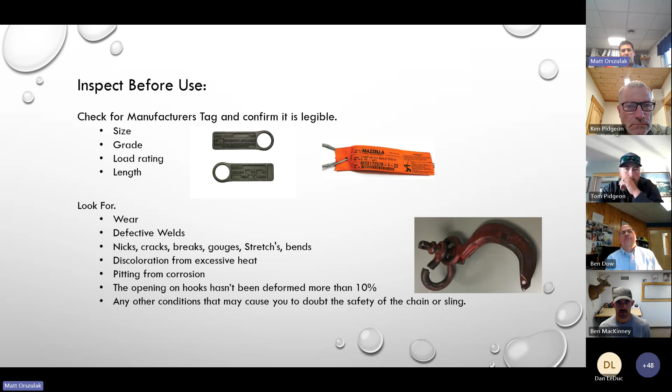Again, it's always that 10% wear threshold. We have gauges to check the links. Tom and I are going to be going out and verifying that, or you can bring them into the tool crib, and Elliot and Bill will also do a thorough check. Usually we do it more toward the tail end of the season, but we're going to start it early because we have a lot of chains out there.

So best practice with chain slings: try not to ever shorten it or tie it. Where we have our biggest problems, where we're snapping chains, is doing stuff under tension - pulling something out of the ground that's stuck, or a trench box or road plates buried in the soil, and we try to lift them with a jerk motion using the excavator. These chains are not designed to be under that much tension.

It's meant to be suspending a load just by gravity, not getting stuff stuck. So side loading too. Anytime you side load a hook or a chain, you're really compromising the integrity, and that's when we see chains snap. And it's a very violent, dangerous situation when we have alloyed metal shards flying through the air. Someone can really get hurt badly.

So those are the type of unsafe acts that we need to eliminate so we don't break chains out there. So really think about what we're doing before we do it and make sure we've got the right tool for the job. If something does change in the field, make sure we're not just grabbing a chain and trying to pull something out of the ground.

So avoid any twisting or kinking. It's the same thing. That's how easily, if it's really twisted and then you put it under tension, it's easy for these alloy chains to become defective and get compromised.

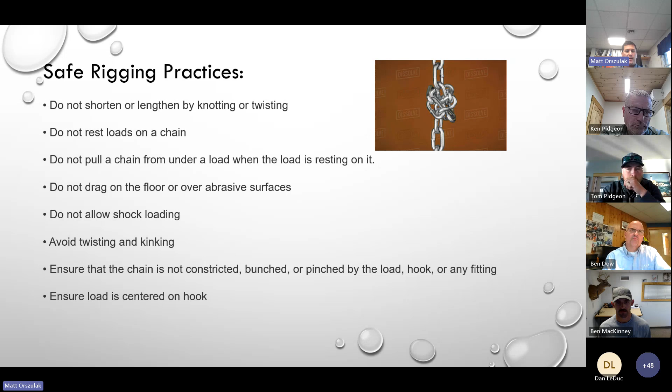So proper care, again, these should be hung up in a dry environment. That's why we have our tool trailers out there. So again, not in the back of pickup trucks. It's fine day to day, but if you're not utilizing them for a while, let's get them up high and dry and into tool trailers.

Or back here at the office, we want to try to make sure that our chains stay in decent condition. When there's a lot of rust, that moisture and rusting of the alloy chains can really compromise our chains. So we want to make sure they're free from the effects of weather, especially if it gets really muddy. It doesn't hurt to power wash them down and hang them out to dry.

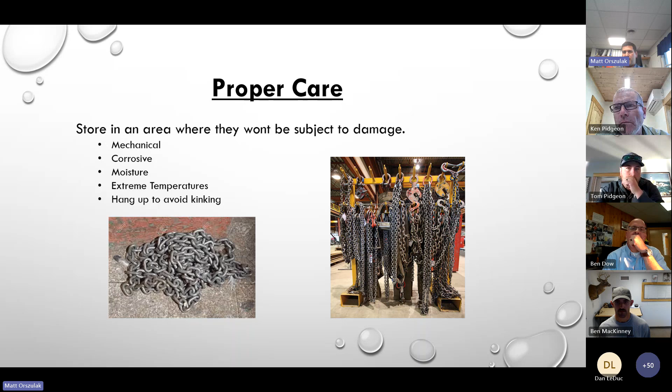So some quick cautions and best practices with all rigging, but chain rigging as well. Again, never pass underneath a suspended load. Never stand in the line of fire with a chain when it's under load or any tension. And make sure all body parts are not between the chain and the load.

We've had a couple incidents, not really with rigging, but with binding our chains down. People fastening equipment onto a trailer, binding it down, putting their hands where they shouldn't be, and then it's under tension, creating those pinch points, putting our hands in between a movable object and an immovable object.

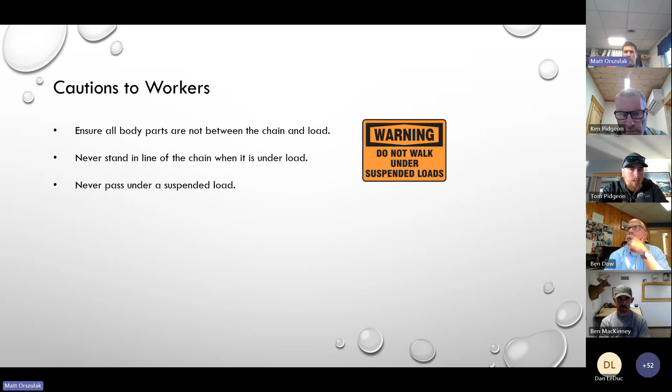So some things to consider this week. But again, let's just follow those best practices, inspect, make sure that you have the right tool for the job. And if you don't, let us know. We'll hopefully get you what you need for all the safe rigging that we do each and every day, all the different types of jobs we have going on.

Is there anything to add, Tom, Ben, Ken, on chain safety?

Just a couple things. One thing I've been noticing is guys aren't necessarily being taught the right way to hook the hooks, especially on trench boxes when they're lifting them up. So make sure that if you have newer guys on your job site, you're showing them the proper way to have the hook facing out, so that it's not going to break the hook.

Yeah, don't side load the hooks. That's part of the training.

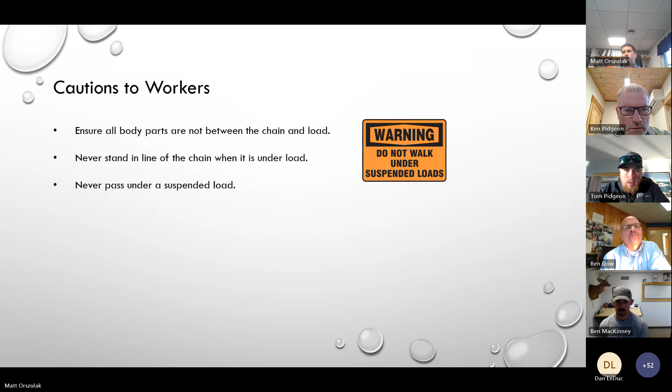Okay, well that's all I have.

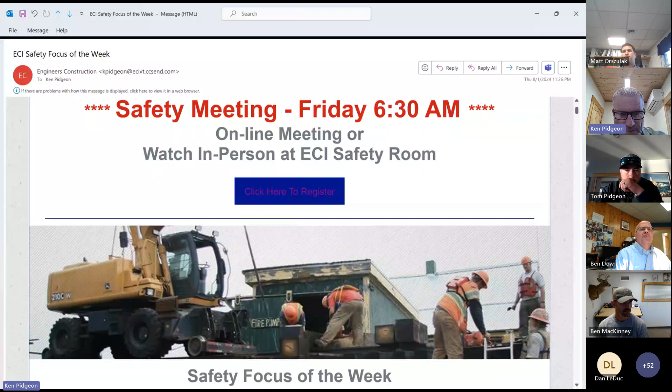All right, good. My connection seems a little sketchy here, so hopefully I can continue. I will get to the ECI focus of the week. There we go. All right, do you see my screen? Yep, we have it. Okay, good.

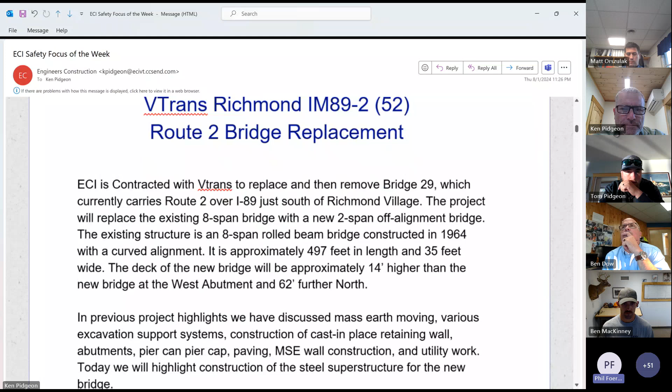ECI was contracted with VTrans to replace and remove Bridge 29, which currently carries Route 2 over I-89 just south of Richmond Village. The project will replace the existing 8-span bridge with a new 2-span off-alignment bridge. The existing structure is an 8-span rolled beam structure constructed in 1964 with a curved alignment, approximately 497 feet long and 35 feet wide.

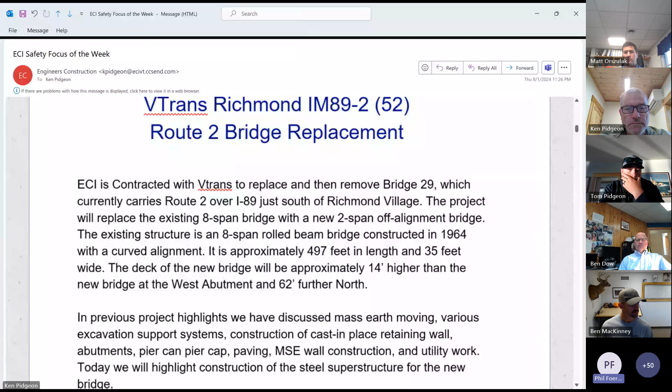The deck on the new bridge will be approximately 14 feet higher than the old bridge at the west abutment, and 62 feet further north. In previous project highlights, we discussed mass earth moving, excavation support systems, construction of the cast-in-place retaining wall, abutments, pier stem, and pier cap, paving, MSE wall construction, and utility work. Today we will highlight the construction of the steel superstructure for the new bridge.

Before we could erect the two 358-foot long steel plate girder spans, we needed to construct crossovers, putting single lane traffic in each direction into the barrel on the interstate.

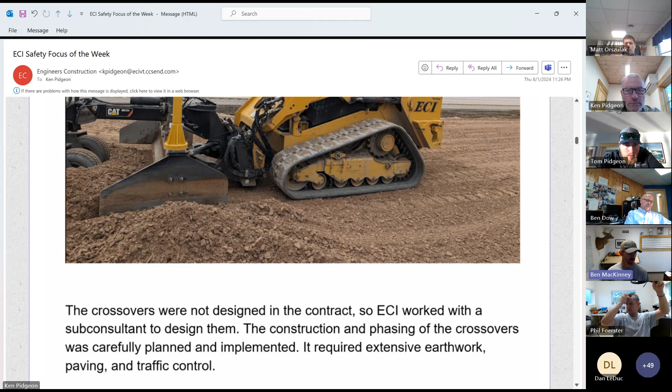The crossovers weren't designed as part of the contract. You were allowed to use crossovers, but it was up to the contractor to design and implement them, from traffic control to curve geometry and tie-in points. Rather than closing the interstate, we elected to use those crossovers, and we worked with a subconsultant to design them. The construction required heavy earthwork, paving, and a very careful approach to traffic control, including safety marking, removal, replacement, temporary striping, and wall barrier.

Once they were built and paved, we worked with L&D to remove existing striping and restripe, and deployed just under a mile of Jersey barrier.

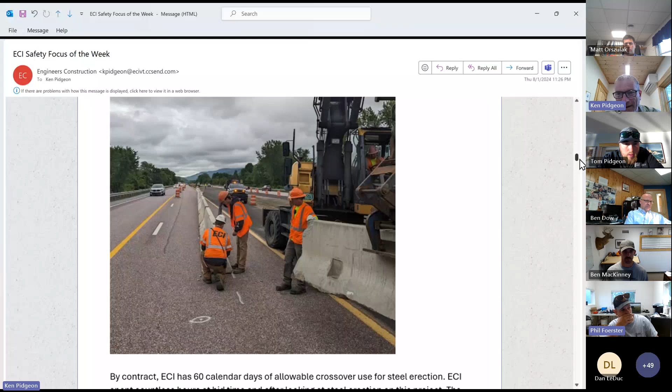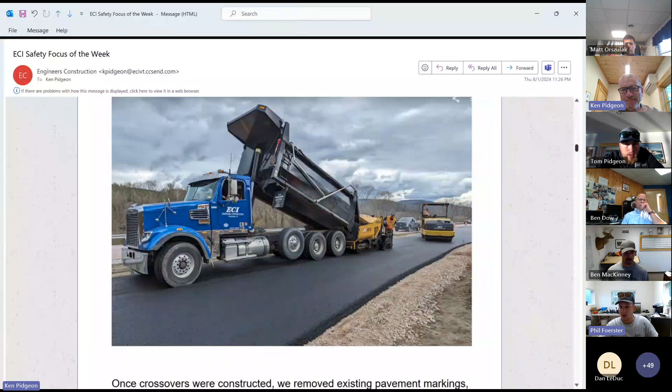By contract, ECI has 60 calendar days.

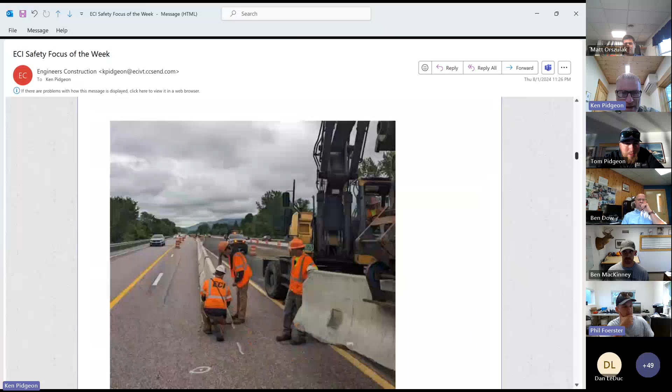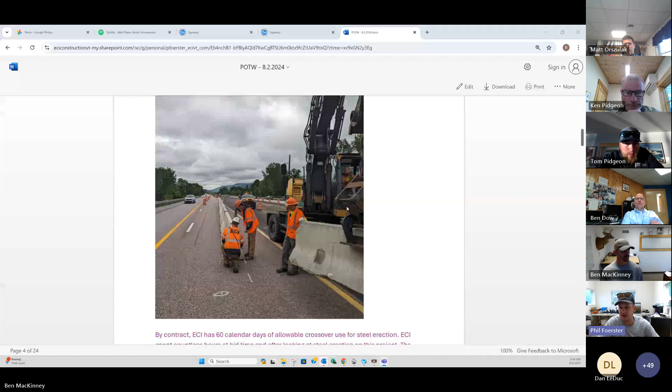By contract, ECI had 60 calendar days of allowable crossover use for steel erection. We spent countless hours at bid time, and after looking at steel erection on this project, the tight site, maintenance of traffic, steep grades, super elevation of the road, and the heavy picks, it all presented an extreme challenge that required several very large cranes.

ECI elected to retain CCS out of Morrisville to erect the steel, while ECI retained the bolting and splicing and the cross frame installation. ECI did the bolting and splicing.

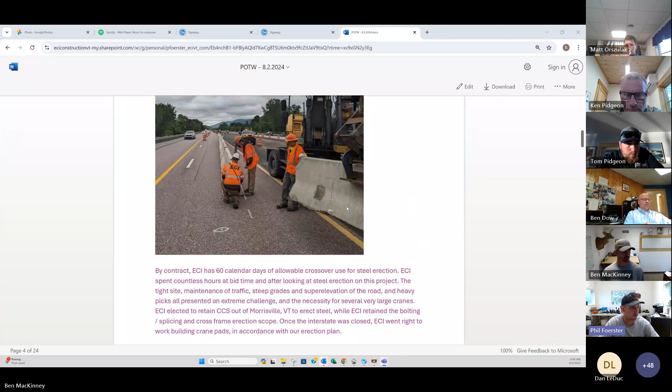Once the interstate was closed, ECI went right to work building crane pads in accordance with our erection plan. There you can see the guys putting out Jersey barriers — they got efficient at it. We put approximately 4,000 feet of barrier down in 2 days, about 2,000 linear feet of barrier a day, which required a lot of support from our trucking guys, who did a great job moving all those barriers in from Bushy Pit.

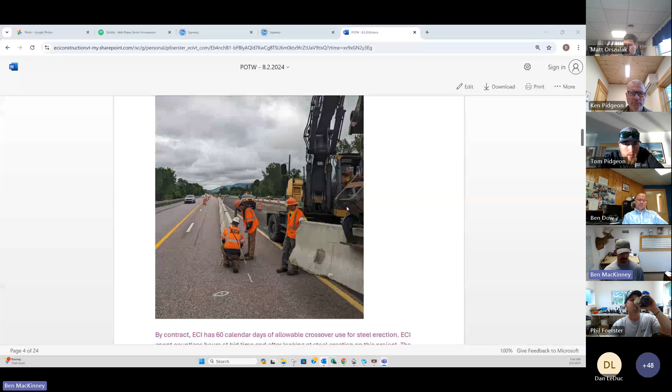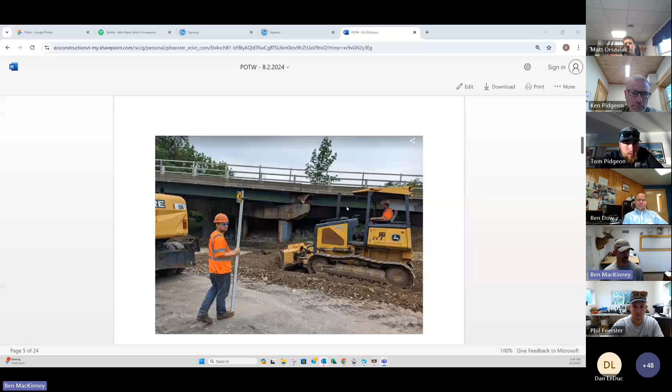Once we started getting the crane work on paper, even at bid time, it became obvious that we would need two 275-ton ATs and two 200-plus-ton crawlers — basically all of CCS's big cranes. You can rent some of those, but it was a no-brainer to bring those guys in on a lump sum basis and have them handle the heavier picks while we kept overall lift direction and the actual erection scope. Here's the guys building one of the pads for the AT.

The curve of the interstate there has some pretty aggressive super elevation. You don't always notice it when you're driving through at speed, that's the point, it's supposed to feel good. But when you're standing there, it's nowhere near flat.

And it's a really tight site. So the crane pads, even on the asphalt, were extensive, with several feet of blocking tapered down to nothing, to

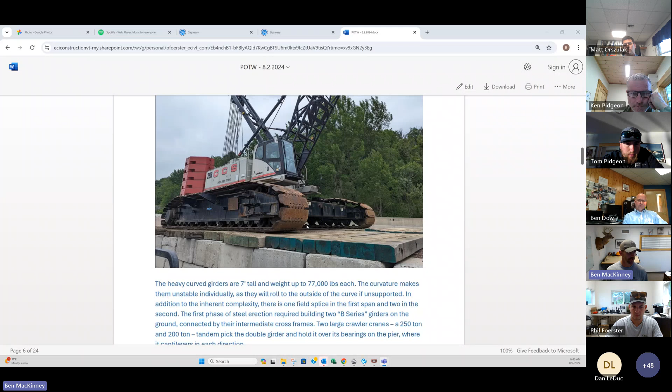keep the crawlers level and in the right position on the asphalt. The heavy curved girders are 7 feet tall, 2-foot wide flanges, of various thicknesses, and the heaviest ones weigh up to 77,000 pounds each, before any splices are made or cross frames are deployed.

The curve of those girders makes them inherently unstable. If you were to set them on perfectly level blocking at each end, they would tip. It's not that they might tip; they absolutely will tip, because the center of gravity of those beams is outside their own internal support at the end.

So even just placing them on the ground was very challenging. What that required was erecting that first big span, which cantilevers over the pier, as a double. Using girder stands that prevent them from rolling, we built the first and heaviest section as a double on the ground, with intermediate cross frames tied together, and then hoisted that with the two crawlers into position in a tandem pick.

That was using CCS's 298, which we've seen on our projects plenty of times over the years, the 250-ton crawler and then a 200 sitting in the interstate. ECI obviously built and engineered all the crane pads for the job.

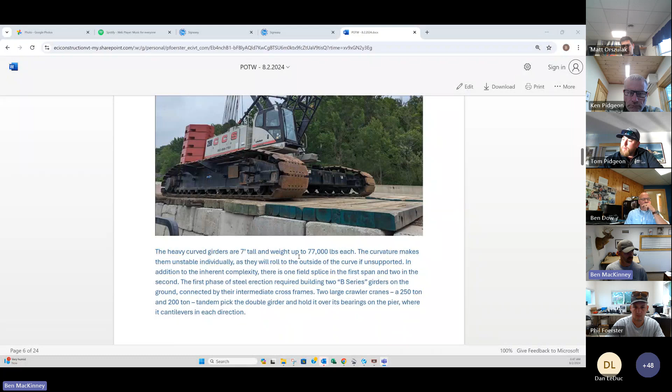Here's the double built on the ground. You can see the big spreaders on the left side where the 298, the 250-ton, has already got its girder, and is getting ready to grab the other girder after we get a couple more cross frames in with the 238.

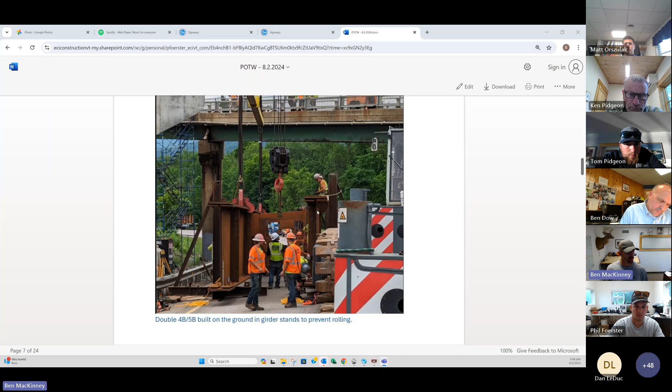The hoisting, the double and tandem, this is that first pair that we made on the ground. The site was tight. The existing bridge is only 60 feet off alignment of the new bridge. The girders are obviously much longer than that, and room on the interstate was limited, especially with how close the cranes had to sit to the girder.

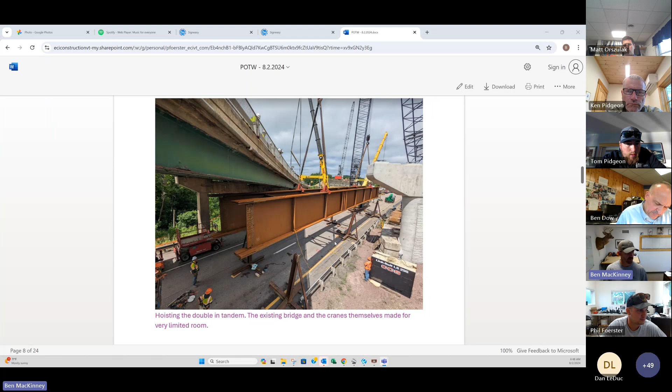So here you can see we had to compromise between setting the cranes close enough and having the girders also not be under the bridge. We ended up having to put them underneath a little bit, and it was a tight tandem pick to get both high enough to get out of the stands and still stay underneath those girders. That assembly with the cross frames and rigging is over 160,000 pounds.

Here you can see once they've tandem picked it up, it doesn't uniformly overhang that pier, so towards the west, there's a lot more of that girder.

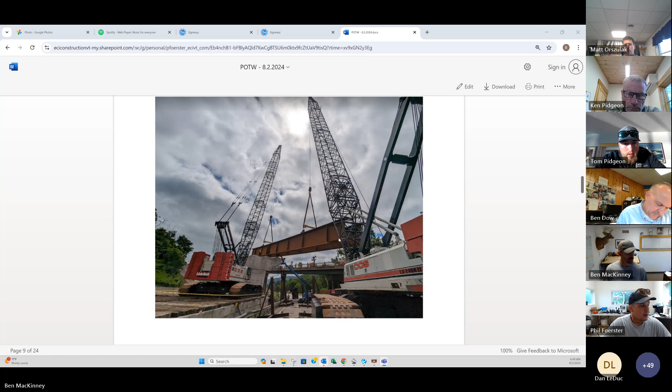And yeah, that's it sitting on its spot. The crawlers held the double right on its marks. It wasn't stable yet, like I was just saying, the west cantilever is much greater, so they had to continue holding it.

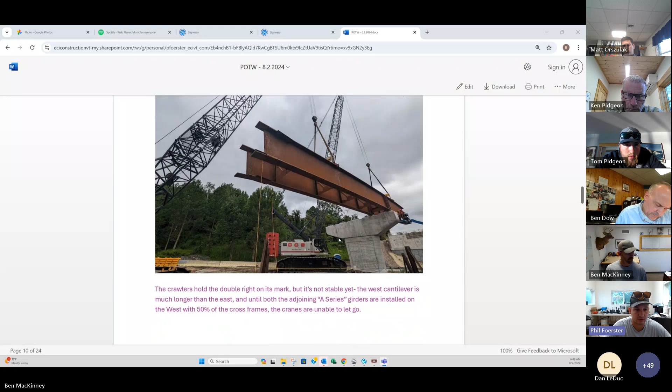These are the B girders, while two other support cranes flew in the A girder series, and then installed 50% of the cross frames.

So here behind this first A series girder, you can see a 275-ton hydro, which is tucked really tight. His swing radius, his counterweight's almost hitting the old bridge, tucked really tight in there. Pretty substantial cut to get him into the bank far enough.

And he actually picked that A series girder off a stretch trailer sitting on Route 2 and then swung that into position. Now we have one continuous line of support from abutment 1 to abutment 2. The crawlers are still holding. Now he's going to hold.

ECI makes the splice in the air. That's a full flange and web splice with, I don't remember how many bolts, hundreds of bolts.

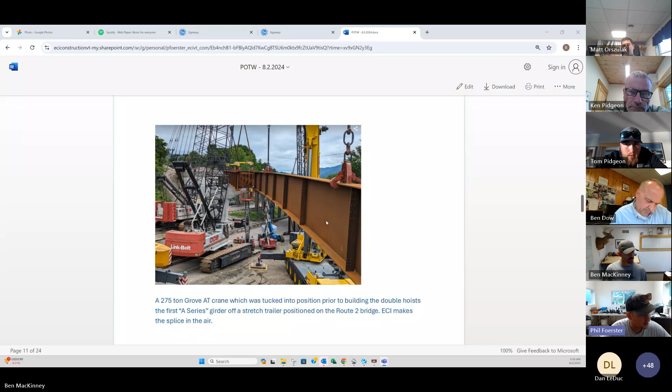I don't know if Brad's on or Phil, if you know off the top of your head how many bolts the splices had. Brad, I do not know. I know it was a lot. 75 just in the web, and then over 200 probably between the web and the flange.

So here's the last one, yet another big hydro. I think it's technically a 265-ton Liebherr. Grabs that last A series, well, the last needed for stability, the 4A series girder, picks it off the interstate very carefully without knocking into it, and swings the 4A. We make up the last splice, and now we've got stability.

Now we've got a full double set hanging off over the pier, but also sitting on abutment one. So now we've got stability. Once we get 50% of the cross frames in there, the cranes can let go.

So obviously this is an operation that needed to get done, we couldn't leave these very, very high suspended loads in the air. I mean, I guess the crane operators could have slept in the crane, but this was important to get done in one day.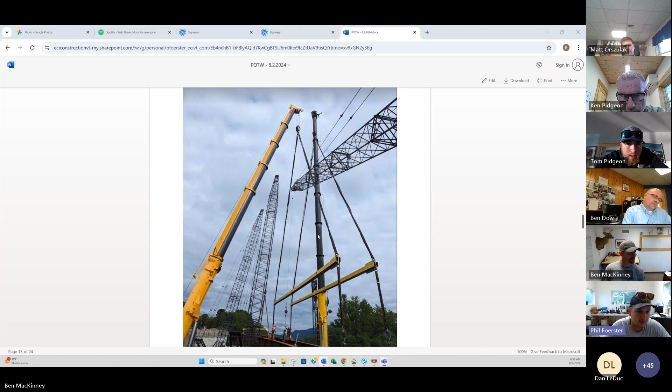We have to boom right between the boom tips of the two hydros and the rigging, just to land those cross frames in there. Nick Peck did an incredible job guiding those in, and he even had to back up a little bit and then drive ahead just to miss their rooster sheaves at the top.

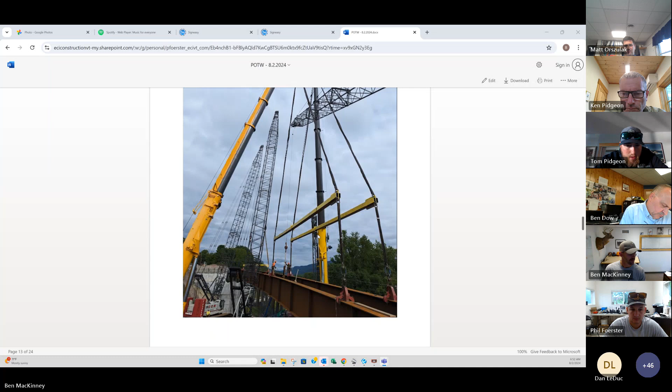A lot of booms in the air, and you can see our guys walking the iron to land those cross frames. Here the guys are making that connection.

So for access, we had one closed barrel, so between all the cranes on the ground, maybe not a ton of access, but some access from the ground with lifts. Otherwise, we use splice cages, these metal cages. They actually just set on the girder and the guys can safely work in. So between splice cages and baskets, we were able to get safe access with fall arrest systems in place to do the work.

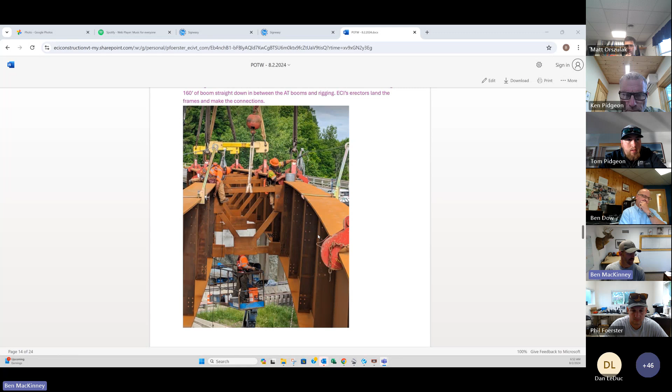Here's Malcolm Foerster giving Nick some tips and pointers on his crane work while the Foerster family looks on.

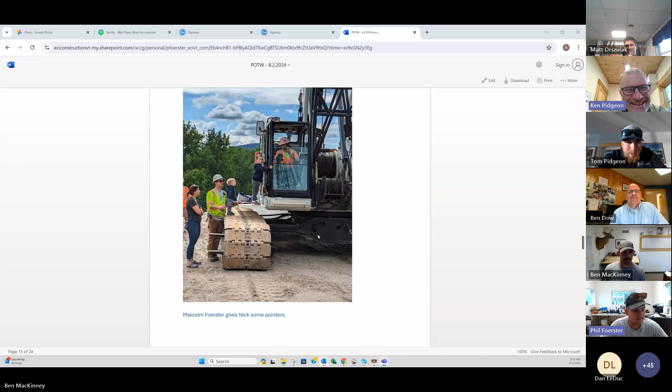Malcolm was there for that critical pick, right? Mm-hmm. I think he was the lift director. Yeah.

So with day one in the bag, you can see the double all set in the background. Here's Phil doing some hook work ahead of the next step.

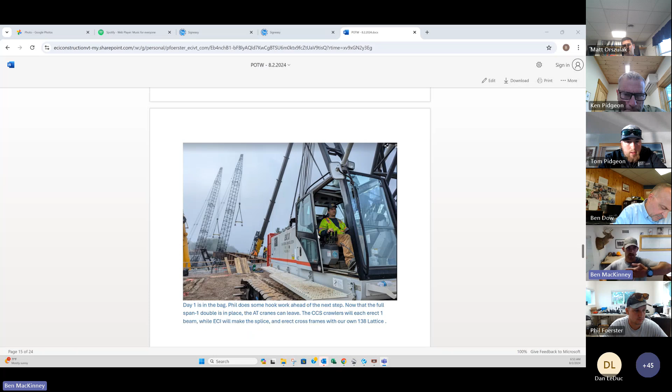So now that we've got that big double in, the AT cranes can leave and the crawlers will each erect one beam while we make the splice in the air and continue to fly cross frames in. So now it gets quite a bit simpler. Still tight, but now we can do a B and an A, splice it, cross frame it, and then keep going for all 6 girders for phase 1.

So once all 6 girder strings are in, we finished up all the cross frames. Like we were saying, we had to do 50%. So every other cross frame had to be in, which allowed us to both accelerate the erection and then come back later when there was less booms in the air, less threading of the needle, so to say, and just slam out putting in those cross frames.

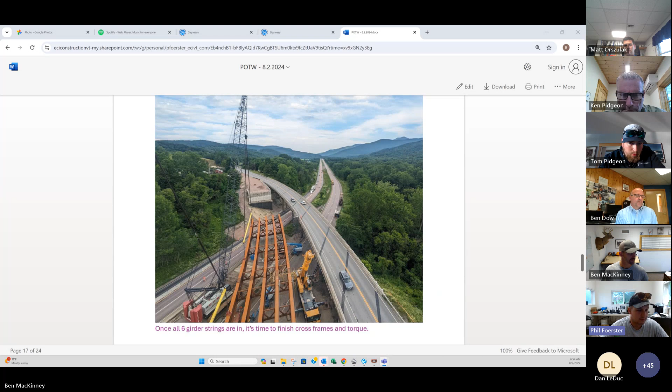The bolt torquing was about roughly 700 foot-pounds that was needed. Occasionally there was a little bit more, but we used special DTI washers, which are direct tension indicator washers, to let us know when we achieved the appropriate tension and the clamping force that was needed.

So the way all these connections work in pretty much any modern steel design is not to have the bolt take any shear. The bolts themselves aren't side loaded in what you call a bearing type connection, but it would be what's called a pre-tensioned, maybe slip critical connection, where what's holding these connections is actually the friction between the plies of steel, and you're holding them so tight that the steel is making a mating surface or a faying surface that can't slip. So that's why the tension and the actual mating surface and the preparation of the surface is so critical.

So we calibrate our torque wrenches. We use electric and battery powered torque guns to do it, and we calibrate those with a Skidmore. But then we use these direct tension indicating washers, which do squirt out a little orange silicone, which is a visual aid to help us see when we're getting close.

But we actually have to use feeler gauges. They have little nubs that will squish slightly. So you use feeler gauges to see how many penetrations you can get, and I think we're generally allowed up to 2. Any more than that, it's not tight enough, and we have to keep going.

It is very... I want to say tedious, but it's a fine line because you have to get them really tight, but you almost snap them essentially. So when you're just trying to go for that last little bit of tension to get that DTI fully engaged, it's pretty common to snap bolts and have to go back and replace them.

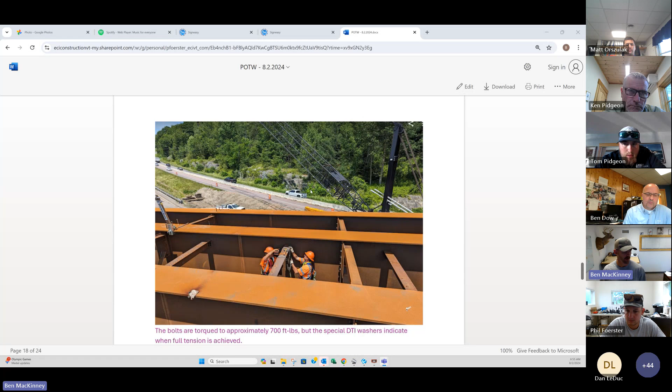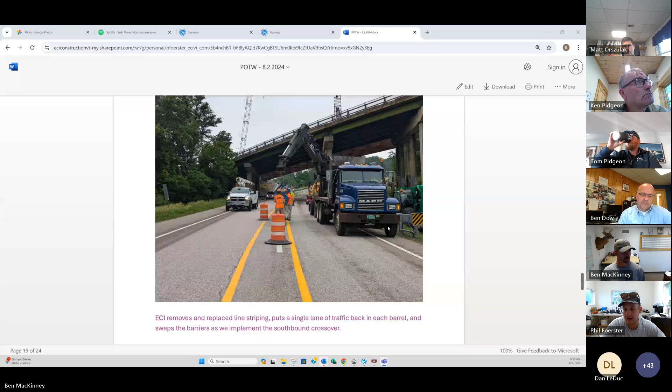After phase 1, we moved over to phase 2, which was all traffic on the southbound barrel. That required the guys to pick up all 4,000 linear feet of those Jersey barriers again and put them in the other lane. They got that done again in a day and a half, which is an unbelievable amount of work. They were really flying. Now traffic was in this current configuration, which I'm sure some of you have driven through, and we were getting ready for phase 2.

Phase 2 was simpler in one sense because we already had steel structure there. We didn't have to set a double, but the next beams weren't spliced in the air, they were spliced on the ground. They were the longest individual spans. So now you have a C and a D series girder, which are lighter, but making up 150 feet. They had a real, on paper anyway, propensity to buckle under their own load.

So what we did is CCS brought back in another AT. We made the splices on the ground for these 150s. I set those with an 85-foot spreader beam, which is extremely long. We'd set that and then fly the next two in, one on each crawler, make that splice in the air, and then set cross frames. That spreader beam, being as long as it was, kind of looked like under its own weight just a smiley face.

It was engineered, but definitely everybody was wary of it. But it worked.

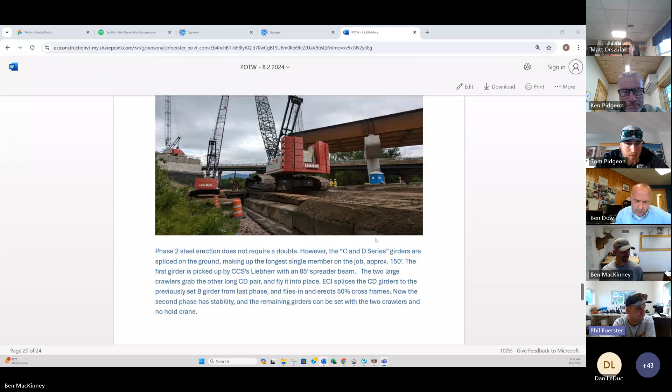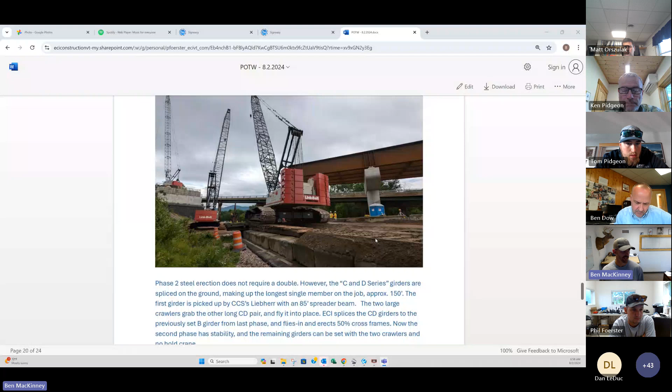You can see the crane pad here. This location had, I think, more super elevation than where we were in phase 1, so a pretty substantial crane pad to hold that crawler. And they were tricky to build because the road both slopes laterally and down the hill as well, so it took a lot of finesse and messing around trying to get those crane pads built just right.

And the key is, you have to be within a certain radius to set your steel, but you also need to keep backing up because as you set the steel, you're getting closer and closer to your crane.

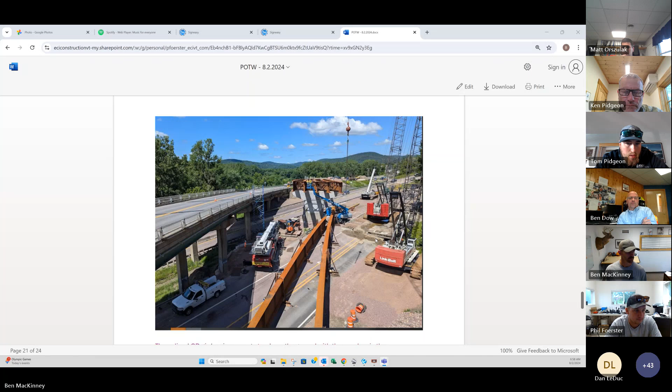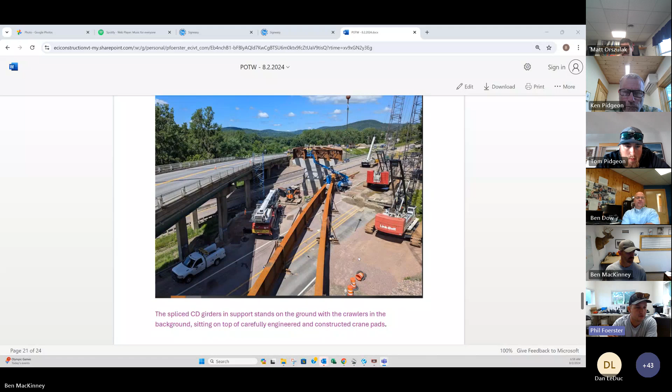So the crew spliced the C and D girders on the ground in their support stands with the crawlers, and then they would fly them up as a pair. This first piece was flown up just with that 85-foot spreader, and then after that those two crawlers would individually, with tandem pick, each beam fly it into place. I'll show you that.

I got time lapse to show how that kind of went together. So there you can see C and D 5 and 6 are up and in position, and the crew is working on their cross-frame connection.

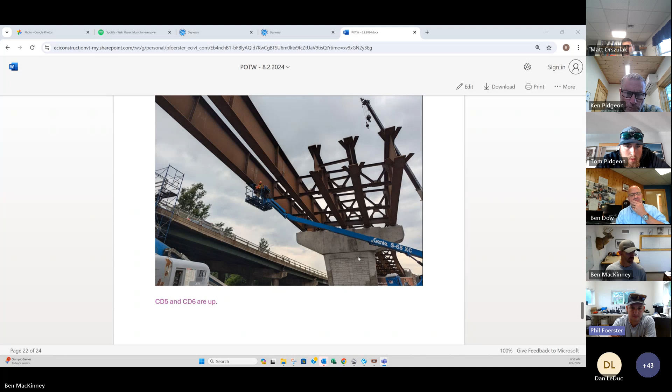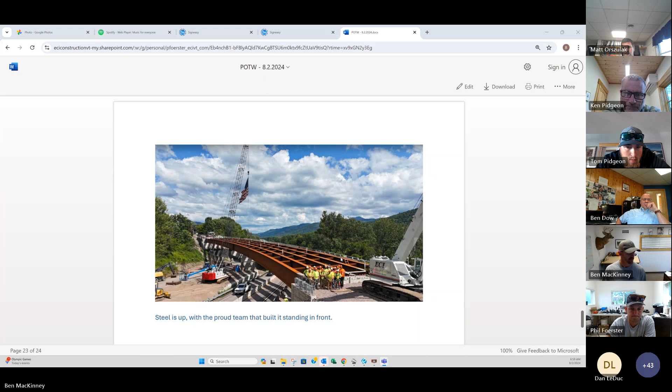And there's our new 500 there in the foreground, which has been pretty handy. And our 138 sitting in the median.

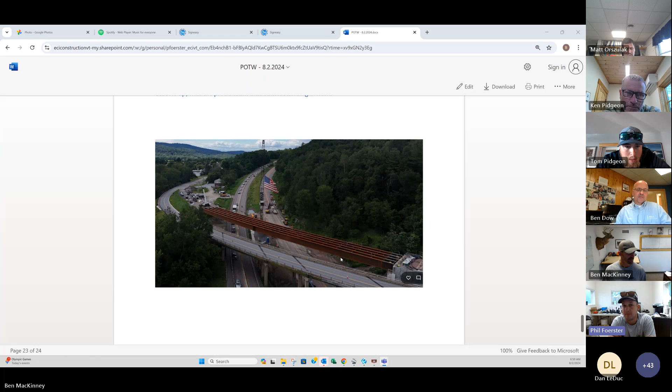And then here we've got 1 million pounds of American steel and a flag bigger than Ken Allard's flying right over the project. Every day when we fly it up, they honk as they drive by. So it's a proud sight and something great to be a part of.

I've got to give all the credit on the flag, Phil. Sorry about that, you got to give all the credit on the flag. Yes, that's true, that I do. Thank you, Ken. Ken did find that flag on Craigslist. It was a steal, and I've since... What are the dimensions? I think it's a 25 by 40. Yeah, it takes a full team to put that away properly, tandem pick it. And it belongs to Matt Proctor right now. He did cough up the money for it, so he gives me a hard time about that.

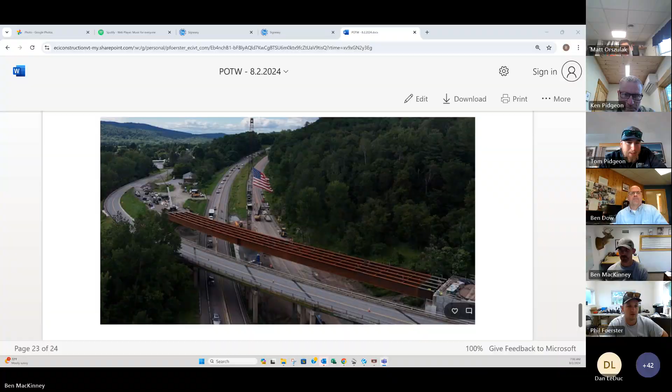I've got just a couple time lapses real quick to put into perspective, and then this is the right one. There you go. I don't know how these always come across kind of weird, it's choppy anyway because it's a time lapse, but here is the...

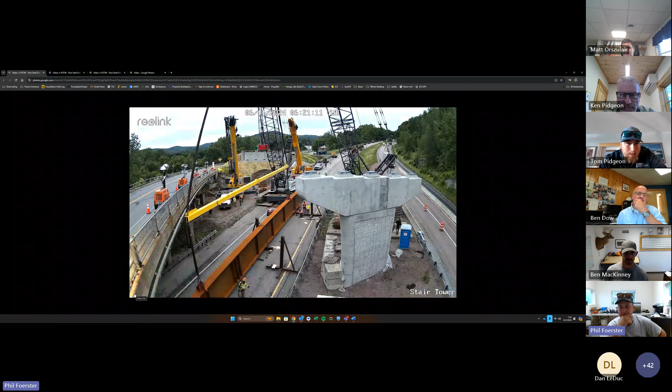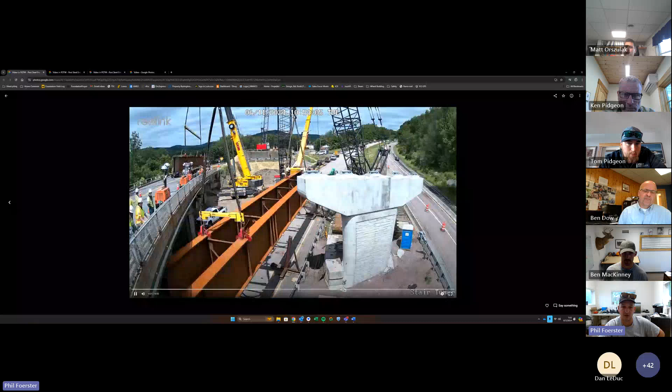5 and 4, the 5 and 4 B girders, being spliced together on the ground in their paired connection, and then in their stands. Once those are erected, the two crawler cranes will swing around with different spreader beams to pick those up, and it goes a lot quicker than it felt at the time. There's Brad getting it set right on top of the bearings, just the way we like it.

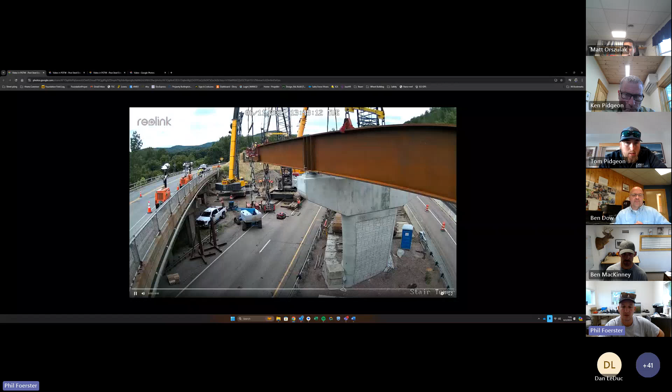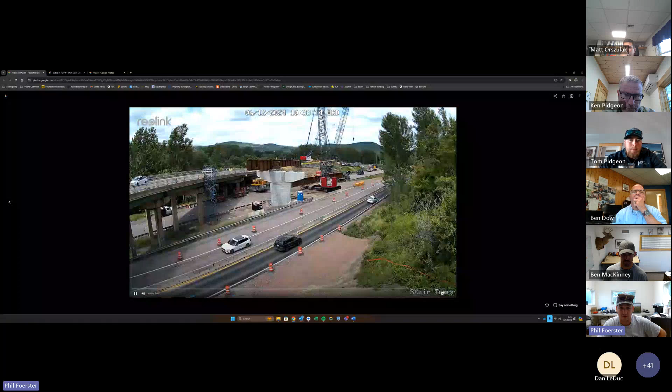The Grove right here picked the 5A girder off Route 2 and flew that into place, and now you can see the team making that connection. It's a little hard to see from this angle, so I got another one. This is post the 5 and 4 erection, but here you can see 3B coming in and 3A.

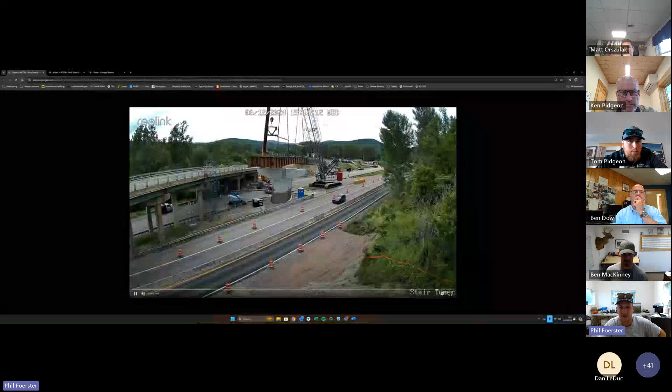That's how that connection is made. They make the splice, keep it a little off level, but it allows them to swing it in properly. They pick it up in tandem and then set it on their bearings. This happened three more times after that, and you can see the guys flying the cross frames in to make all those connections as well.

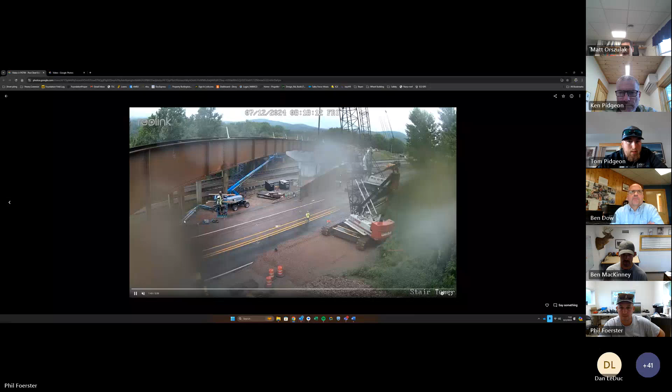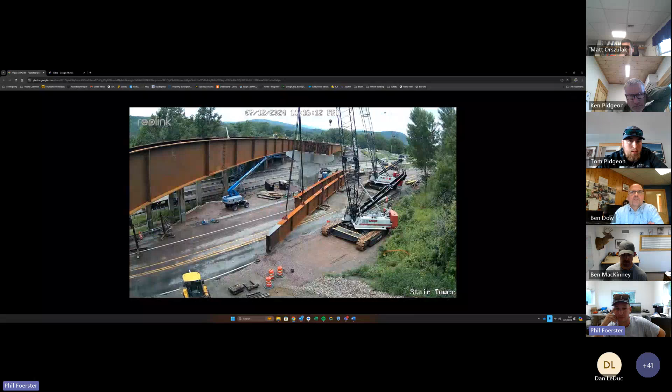From a closer shot, here is span 2, or phase 2 so to say, and this is us assembling the C and D girders on the ground. This was actually right during the Royalton shutdown, so CCS was eager to keep going, and after some delays due to submittals, they felt it would be right to help out and make these connections while we were in Royalton, so that when we came back Monday morning we were ready to fly these girders right into position. That effort was really appreciated. So those are sitting in their stands; they're not paired together.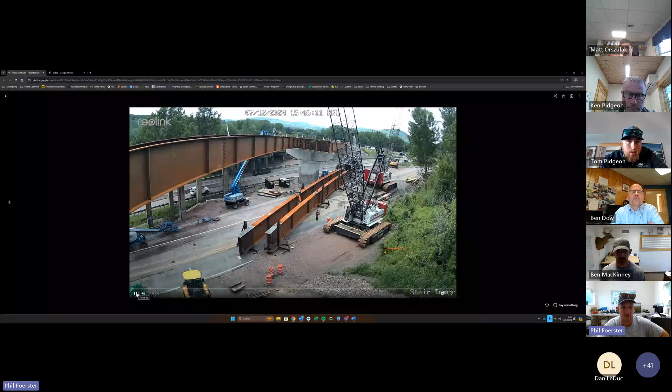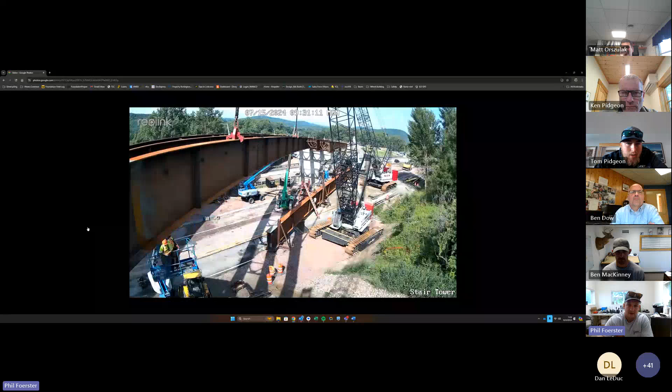Here is the tandem pick by the cranes, flying those right into position. Again, it always seems faster in these videos. We're using our new JLG Lull to fly cross frames in. We had a hard time getting our booms past each other, so we used our lull without forks on it to lift each cross frame into position.

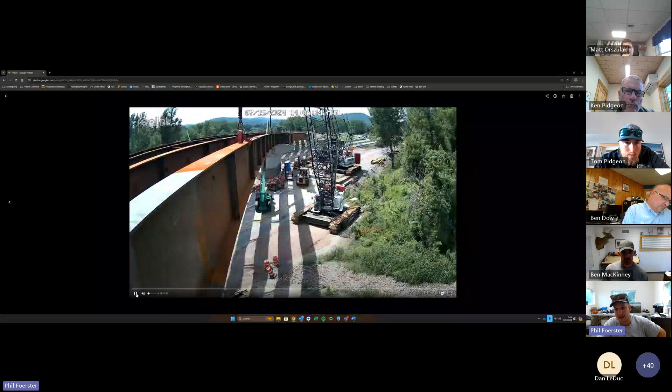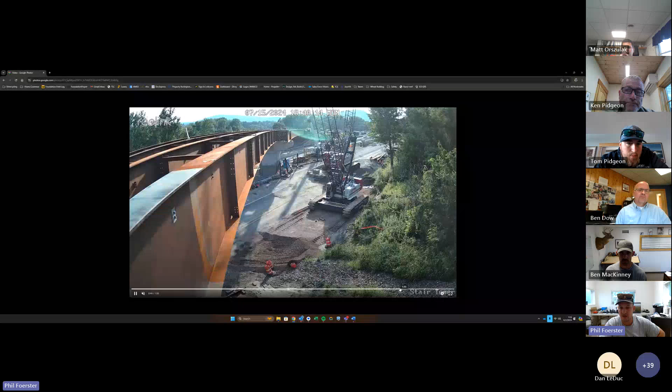Under here you can see the guys. Like I was saying, the crane pads had to be moved because the bridge kept getting closer and closer to the crane. So here you see the guys working on building a crane pad while steel erection's taking place, and that allowed the crane to back up just a little bit further to set the final girder, which happens later on.

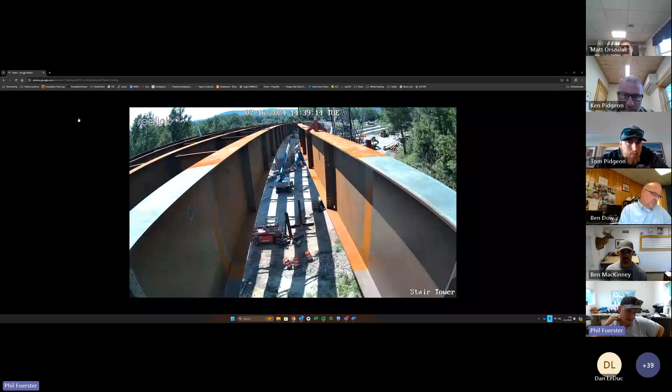So that is steel erection in its entirety, and right now the guys are working on putting in deck pans and overhang brackets. We've got the concrete guys here and the steel guys, and next time we'll present probably once the deck is on.

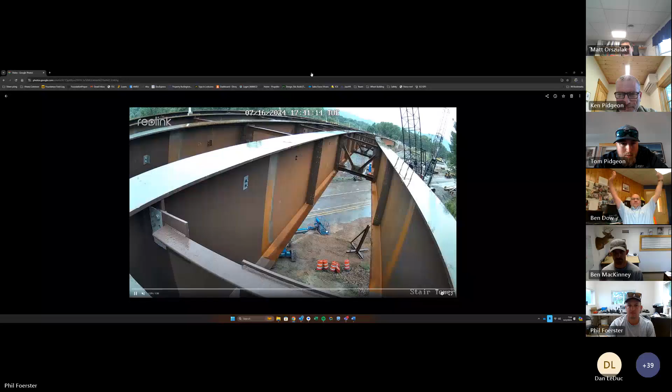Perfect, nice job. Nice pictures, thank you. Great presentation.

But do you want to cover the archive photo? Yes, one second, okay. Sorry. Throw it up. I'm almost there, do you have it? I got it here. Oh, boom! Beat you to it.

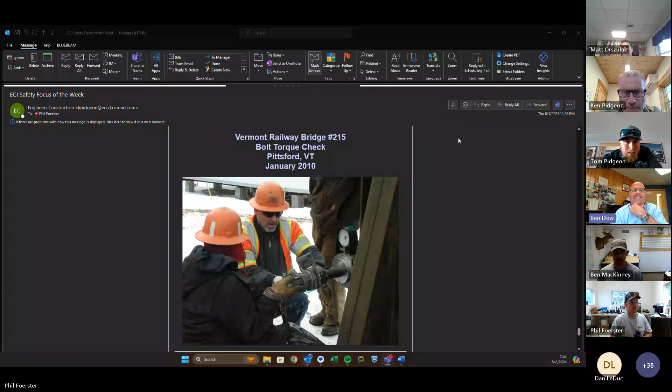There's Gene the Machine using a hydraulic torque wrench and a Skidmore to do those bolt tension and calibrations we talked about. You're correlating a tension — it doesn't matter. Torque can be influenced by the threads, whether it's galvanized or not, how much wax it has on it. So torque can vary, but what's important is tension, to get those steel plies clamped together like we talked about. So we use this Skidmore device to correlate tension to torque and set our guns. We don't really use hydraulic torque wrenches anymore for this, but 14 years ago that's what we were doing.

It's cool, yeah for sure. All right, good, thank you very much guys. Let's turn it over to the safety department. Yeah, hey, I got excellent. I got something, Matt. Go ahead, Ben.

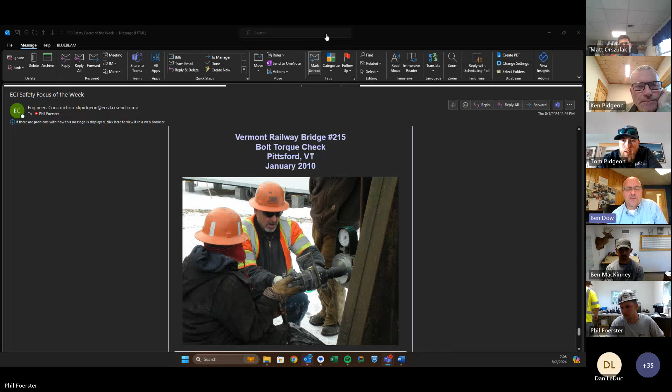I want to thank everybody that participates in this meeting. We're really busy right now and it's hard for everyone to plan to do this, but I think it shows respect for our culture and it's a weekly discipline of honoring that safety's our highest level priority, because it's really easy to flip those priorities around when we get busy, and that's when things happen and people get hurt. So I want to thank Ken and Scott for allowing us to do this every week. We pay everybody to do this meeting, and I think it's important to our culture. Always remember that we appreciate everyone being on here for this half hour.

Thanks, Ben, definitely a key part of our culture for sure I think. I think it is, and it's great to have the guys participate and present here. I think that makes it special too. Yep, it does.